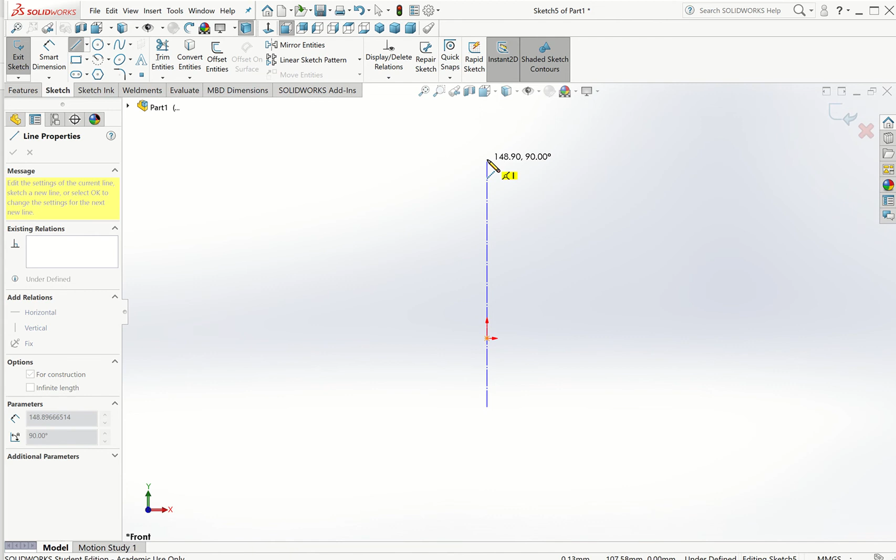So to get started, we're drawing on the front plane, and you can see my origin highlighted here. I want to come in with a center line, highlighting there so the line comes up, confirming I'm drawing on that center line. I just want that line like that. Now I'm coming across, hovering over the origin again because I want to draw this line like so, and then over something like that.

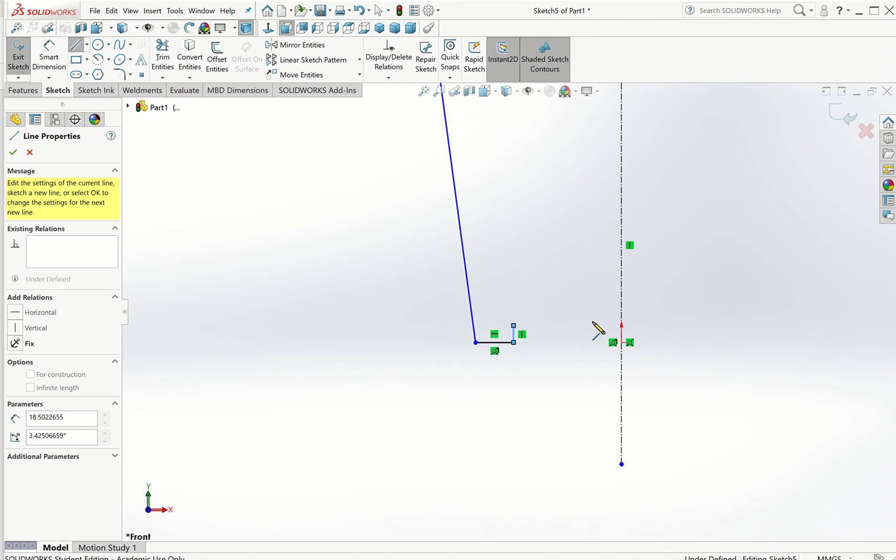So it doesn't matter what dimensions I use here, this is just drawing the sketch, and then we're going to add the dimensions now. We can just put this here for the time being.

So that's smart dimensioning. You usually have a document available with all the measurements and the steps to go through.

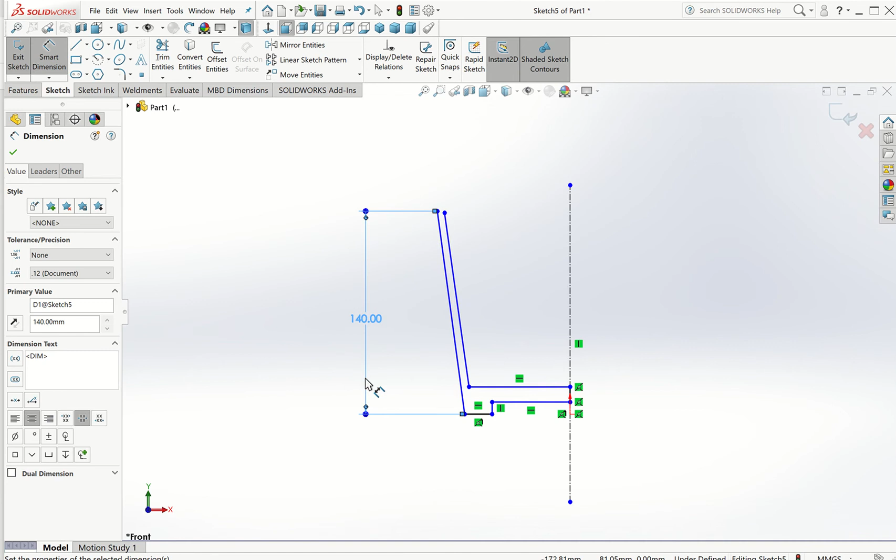So this is 140, I believe. 140. Okay, I just have an error in that row. So 140. This is 10. This distance here is 4. And the distance from here to here is 15.

And then also from this corner to this axis line, this is 30.

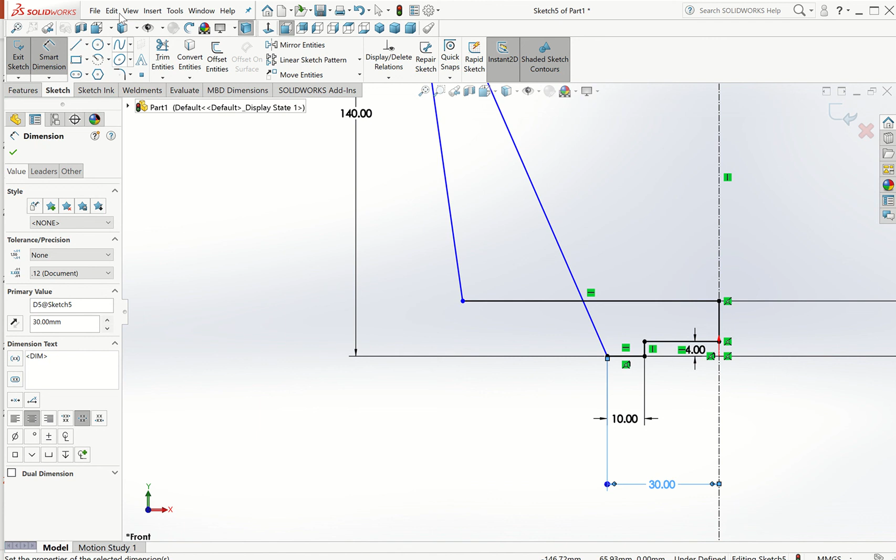So I just want to bring that in. The next step is from this point to the axis is going to be 35.

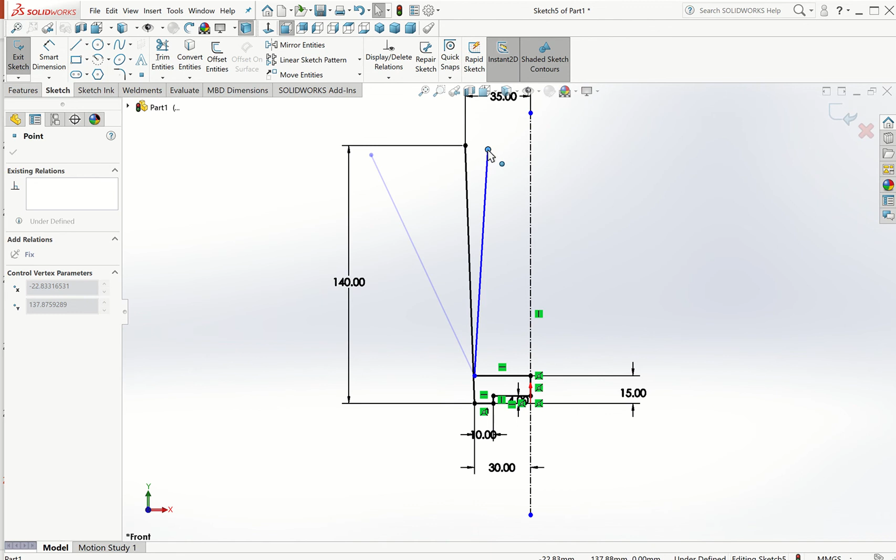You'll notice that this line is coming off of me, so I'm just dragging on it to bring it over. Because it's not defined, we can actually just move it around as we want. And then this point here, so I'm bringing this over.

So I want these two lines to be parallel. If I click on this line here that we're after defining, and this, and hold on parallel here, that will make the two of them parallel.

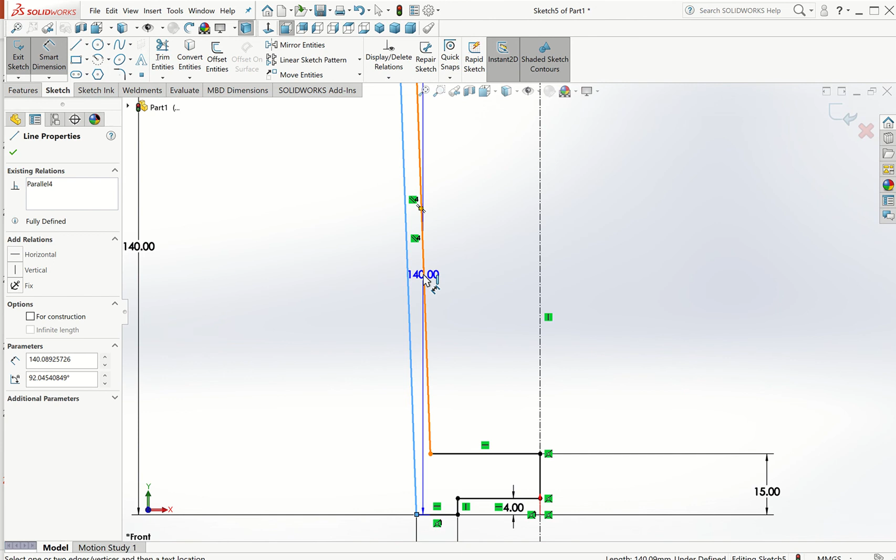So the next thing is the distance in between here, so I want that to be 2.

Now coming up to these 2 points on the top of the glass, I want this point and this point to be horizontal. And then to close the sketch, I'm just taking my line here and bringing it across to join those up.

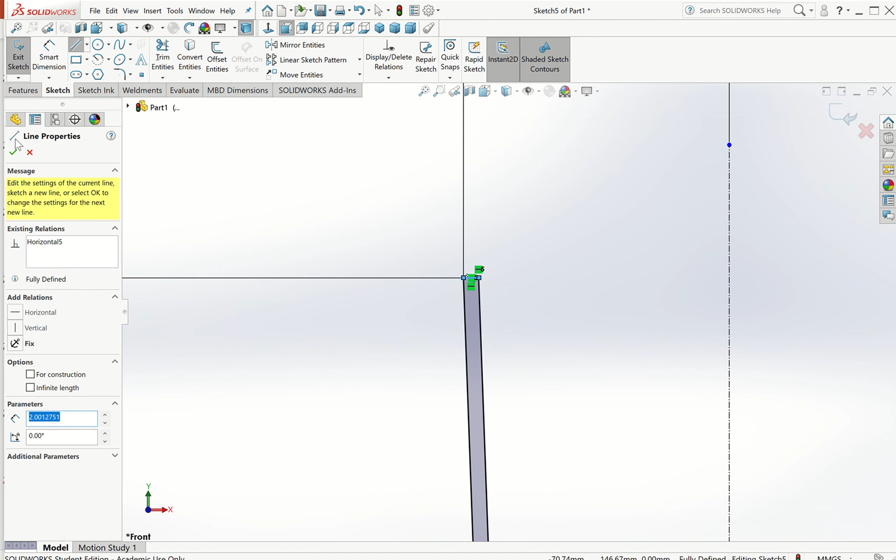And that, I believe, is just ready to revolve this glassware. So I just want to double check in the document that I have all the correct measurements. So 15.4 - oh yeah, I just have this little radius here at the bottom, so I'll do that now.

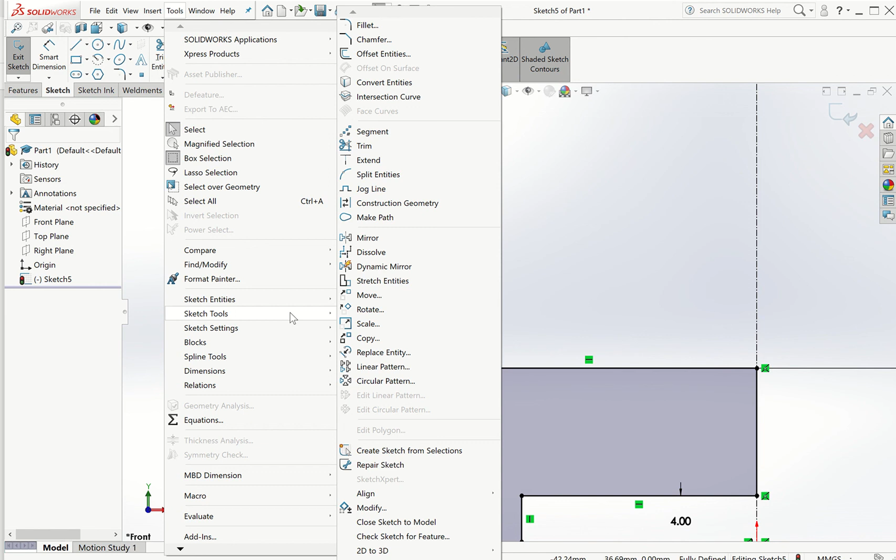So if I come down here and go to tools up here, I want to sketch a fillet, but since we're not going to features, we need to go to the sketch tool. So I'll drop down this menu and you'll see fillet up here at the very top. I want to make a 5 fillet, and it's going to be like so, and that's that. Now we're ready.

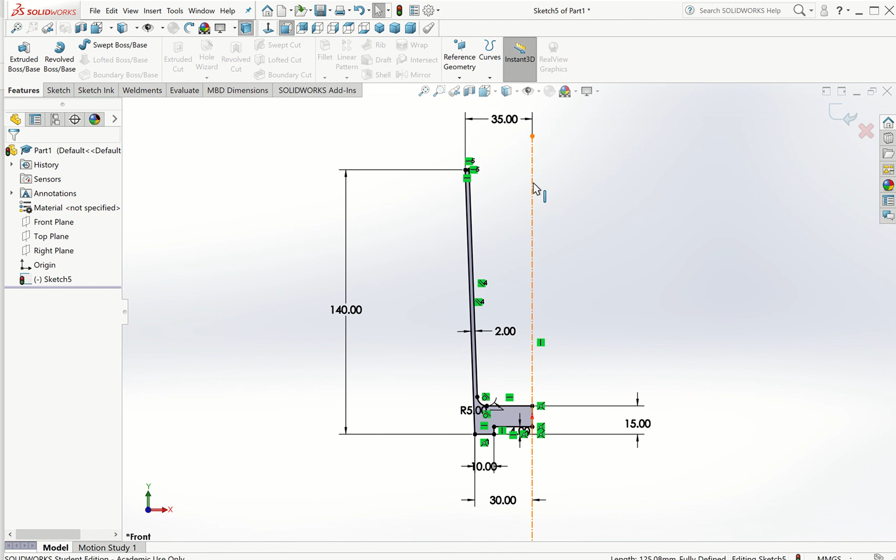So we're going to be using this feature here, Revolved Boss/Base. Basically, if you draw something and want to revolve it around an axis - in this case we're revolving around this center line I've drawn. So let's click on Revolved Boss/Base, and my line of revolution is this center line that we drew.

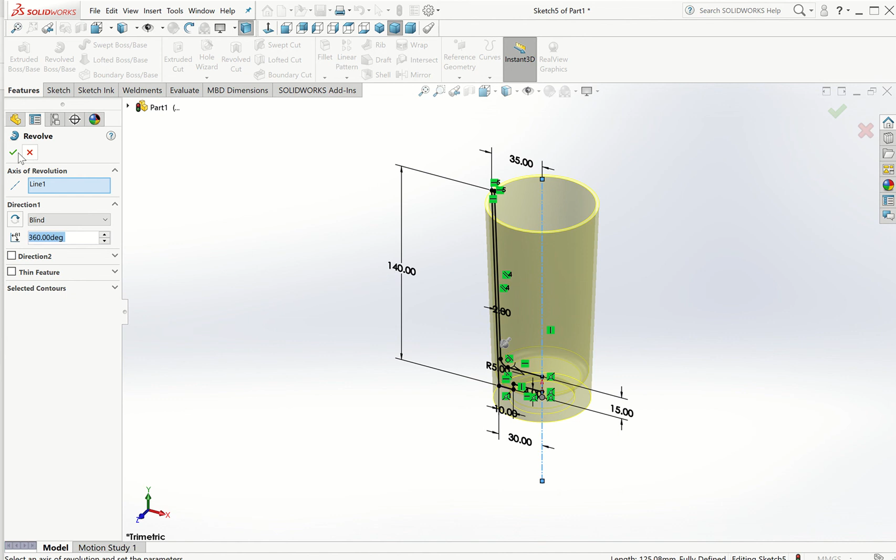Essentially what we're after drawing is just rotating at 360 degrees. If you only wanted to rotate a certain amount, you can change that - let's say if you wanted a half glass, it'd be half of 360. This is just rotated around, and that's creating the glass. So that's good to go - as you can see now, we've made the shape of the glass.

So we have a couple other processes to do. Let me just check what's next. This document is just describing how we did that process, but it's quite simple.

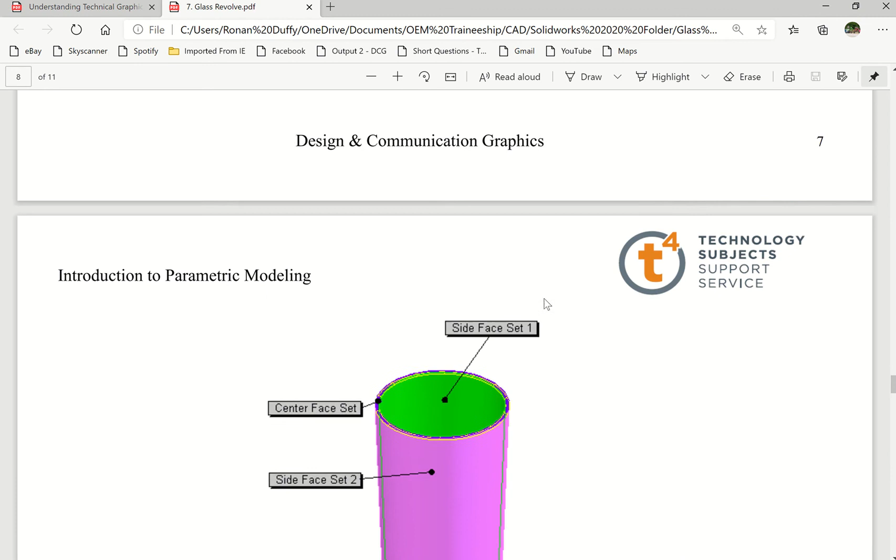So now they want us to add a fillet on the glass. Let me just see what mill these fillets are - it says 3 mil edges. So if I come here to fillet and constant size fillet, I want to do 3.

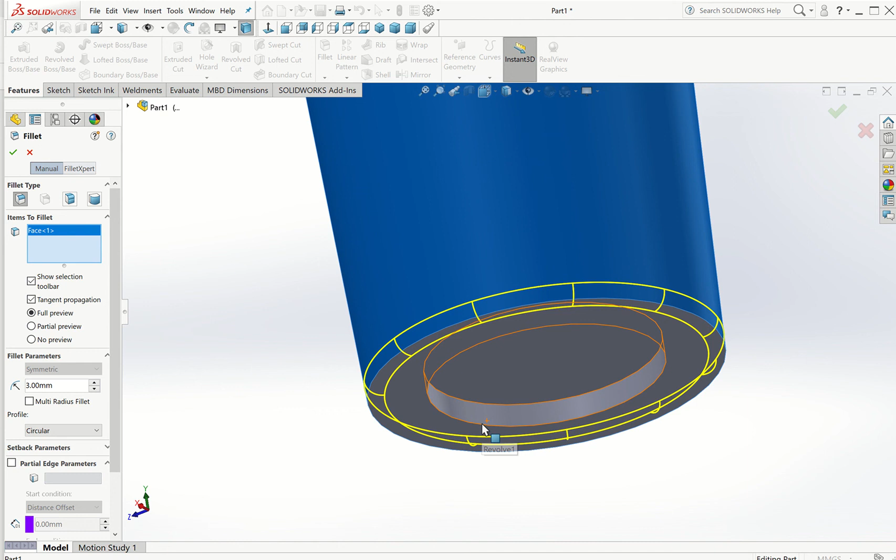And yeah, those at the top and the bottom I want to do a fillet on, and then also in the bottom section here, let's do a fillet. Just clicked on the wrong one, so delete that. Yep, and that's the fillet done for the glass.

So let's zoom out of that so you can see the curve on the top and then on the bottom as well.

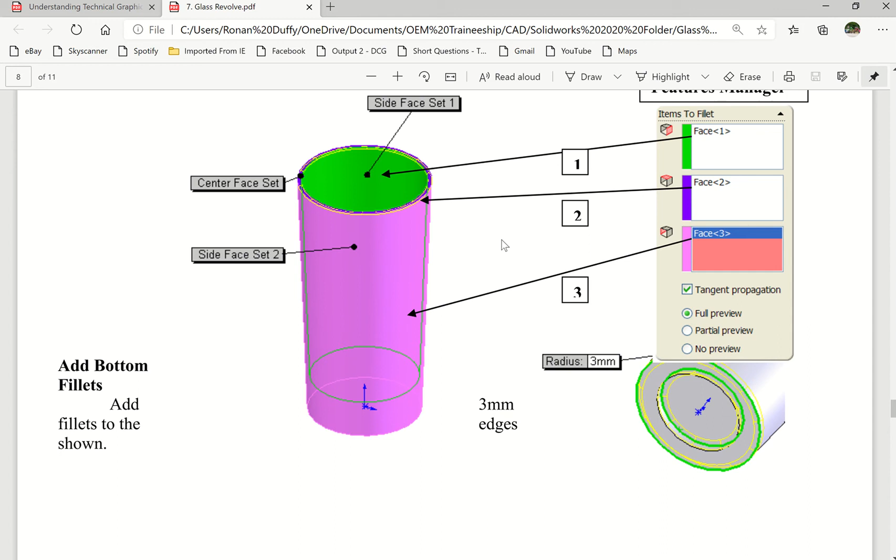So the next thing is just putting writing on the base of the glass. We'll do that very quickly. So just to change my view, I want to view from the bottom, so I'm clicking here.

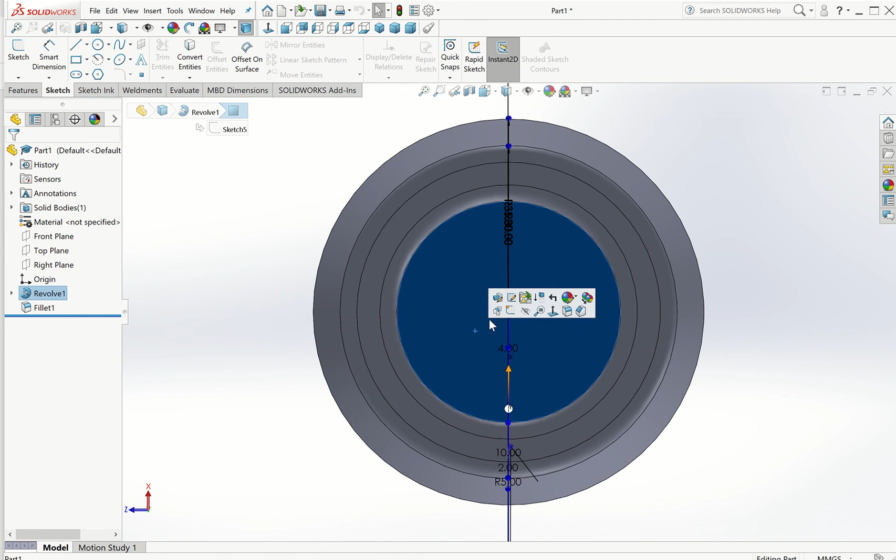What I want to do is a center point sketch. I'll just X out of that. So I want a center point sketch, and I want to draw on this surface here.

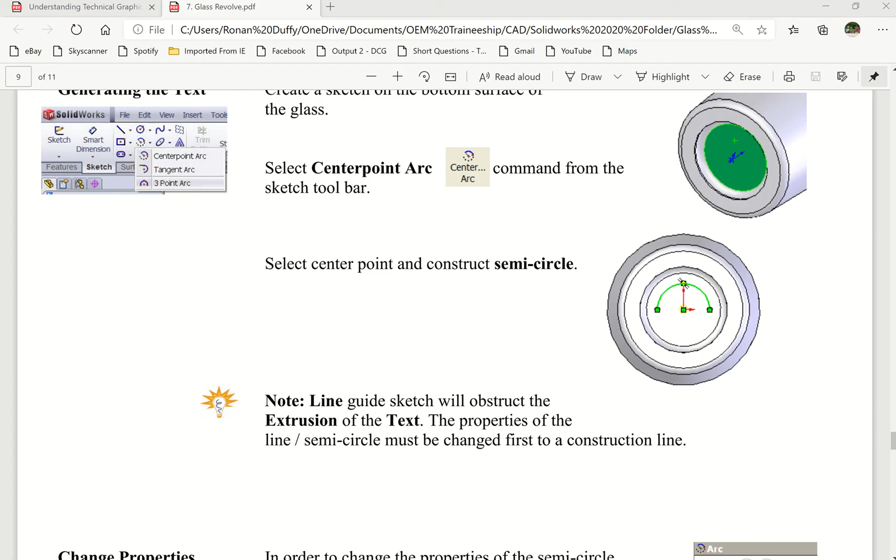So I just clicked on it, and what I'm doing is coming across at 90 degrees, and then highlighting where I want this. So when I get down here, you'll see 180 - that's exactly the curve I want. Let me just check what radius they want this - it's radius 10, and then we're just putting glassware in.

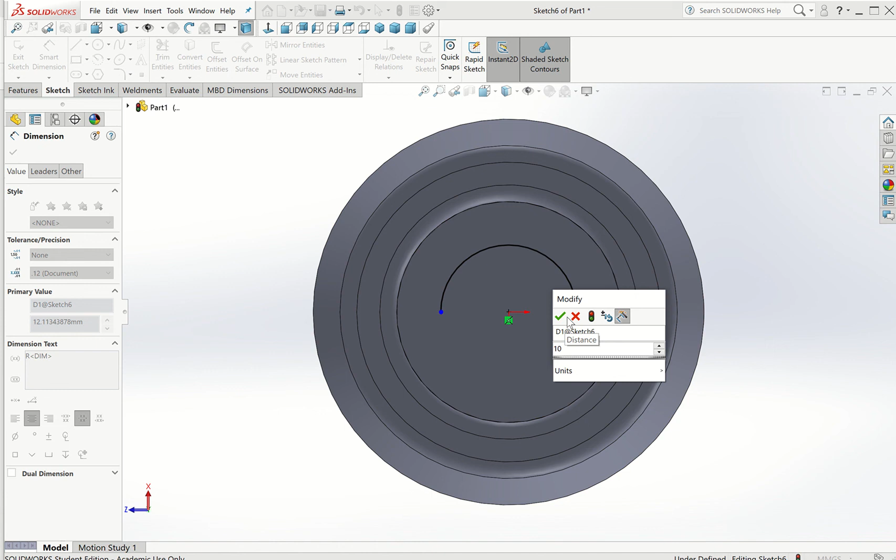So I'll smart dimension this. So this is going to be 10. And then come in here, it's glassware.

So the curve - we want to actually draw on this curve here that we're making. So it's glassware, and then you'll notice this is the wrong way around, so we can change it here - flip, and then the other direction. So there we go, and then also I want this to be in the center of the curve, so I'm just putting that in the center like so.

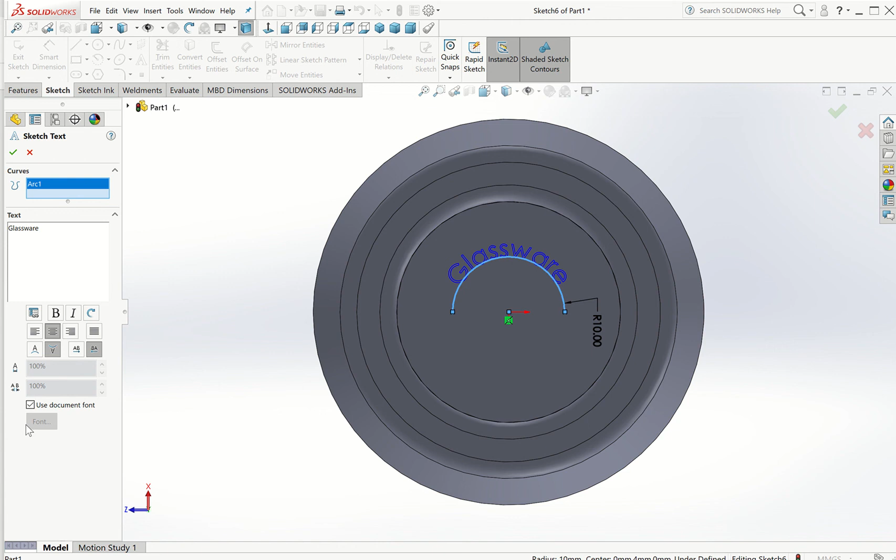So to extrude this, I want to delete that line we were sketching on, just to allow me to extrude it. So yes, I want to delete that, and then features, extrude boss base, and let's just extrude that by 1 mil.

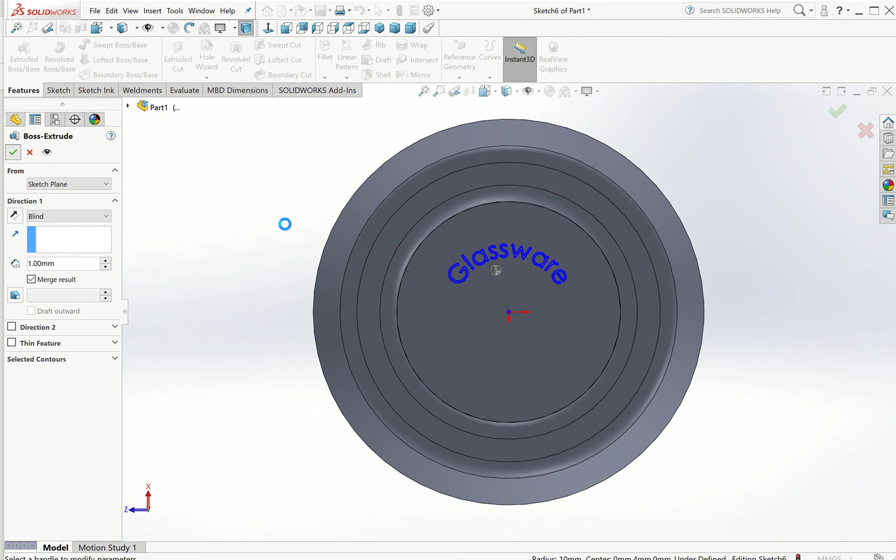So we can see that their glassware is extruded. And then finally, let's just put an appearance on this. So drop this down, we're going to glass, and just clear glass. I double click on that, and then that's just showing us the shape that we're after making.

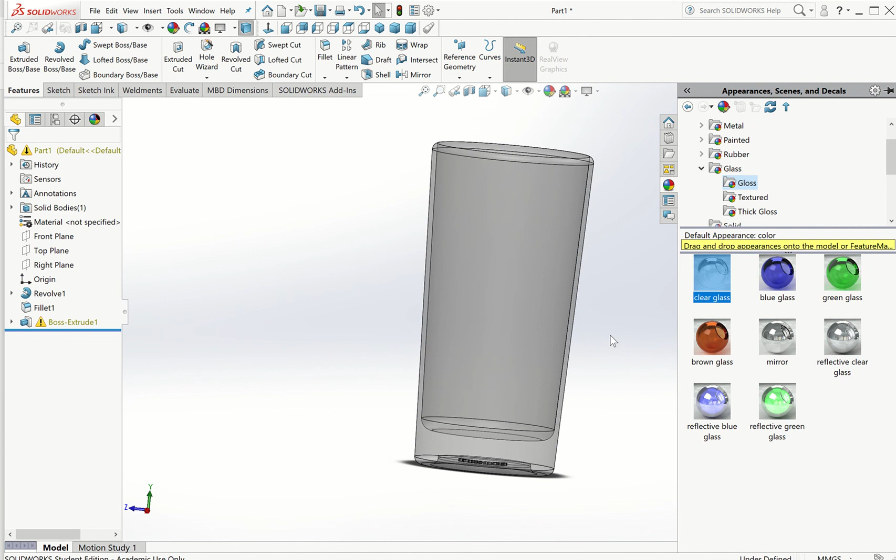So that's skills demo 7, and that's just the video, so that part's completed. As you can see, it's quite simple - we shouldn't have too much difficulty with this demo. Okay, thank you.